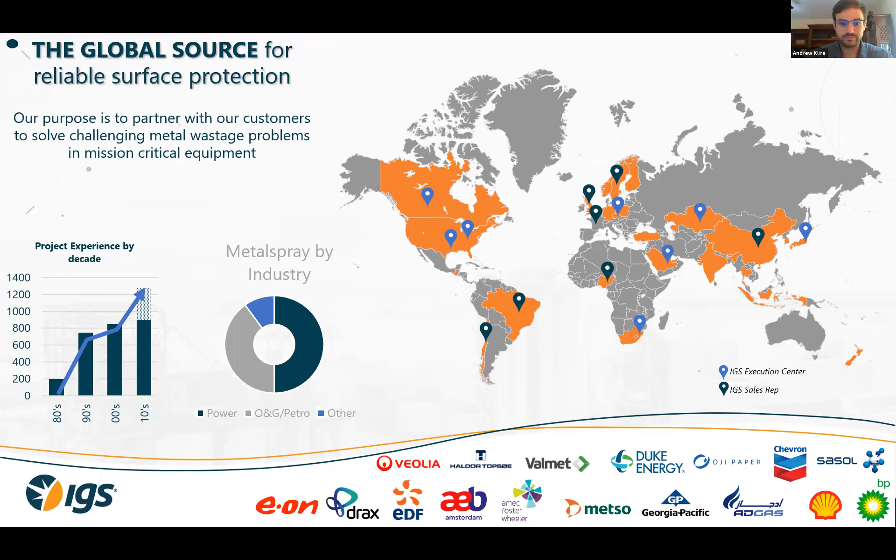We like to kick off all of our presentations with a safety moment. Obviously we're a field service entity, so field safety is very important for everybody. I had an interesting experience over the weekend - nothing bad happened, but it caused me to turn around and go, man, that was a little dumb.

I was out on the Chesapeake Bay, and we were going back to a marina by boat, and we had an option to either go back to the marina, about a 15-minute ride, or go back to the dock, which was an hour ride the other direction. The rest of the group went to the marina, and I let everyone know at the marina that I was going back to the dock, but I didn't tell anybody that was back at the dock that I was going back to the dock.

And realizing I was leaving right around dusk, part of it was a night ride, and on the bay, if something happened and you drifted out, didn't have cell service, no one was really expecting me. So it caused me to take a step back and think, one, how dumb that was, but also how that relates to travel - most of us travel for work. Make sure people know where you're supposed to be. If you get stranded out there with no cell service and an hour's walk in either direction, that can make for a really bad time if someone's not aware.

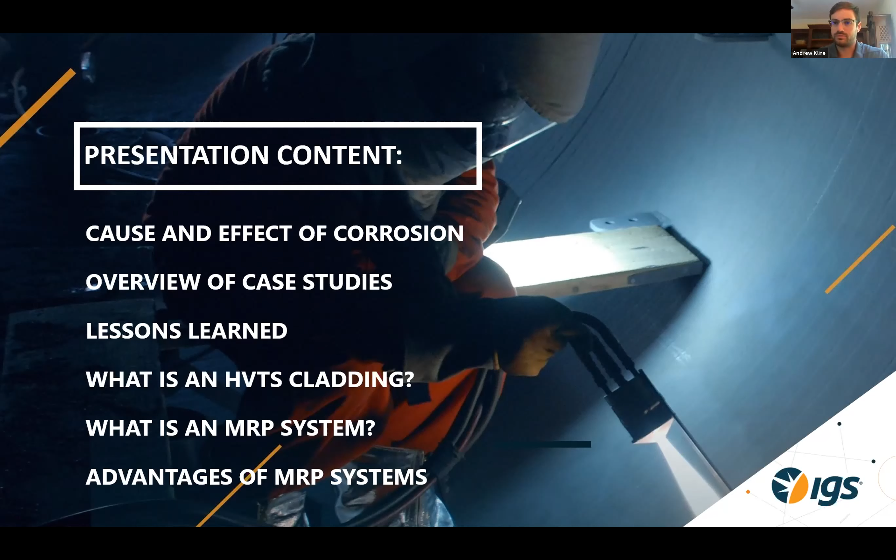So today, jumping into the meat of the presentation, doing a broad overview of what causes the corrosion, why we're seeing more corrosion in recent years, and an overview of a case study from about 10 years ago that's been in service the full time. Then lessons learned from some other situations and how we were able to make improvements on the already reliable technologies. And then what is it, how's it work, how's it relate to the changes we've made, and lastly, what are the advantages of the changes made to the technology in the SDA applications?

So we all know the basics on dry scrubbers - they're designed to be dry, not supposed to have any aqueous solution hitting the wall, any moisture, anything like that. So most of the OEMs made them out of carbon steel because it's cheaper and it should work. But as we all know, this day and age, we have cycled loading, low loading conditions, economic reserves, different injections for different reasons, some emissions control, some efficiencies. All of these things can change the chemistries and the environment in the SDA, and that can lead to a lot of these corrosion issues.

What we've seen is there's some units that always had corrosion issues that were well known and documented, and they knew they had to deal with them. But on the flip side, we've seen more and more units that have been periodically checking to make sure they have wall thickness and aren't experiencing loss, and then all of a sudden, this last check, they had a dramatic loss in wall thickness. I think that's really in part to the cycled and low loading conditions - it allows us to get closer to the acid dew point temperatures, and also different flow parameters allow flows not to be uniform. Wetting can occur in one area, overspray might be happening because of the flow discrepancies and things like that.

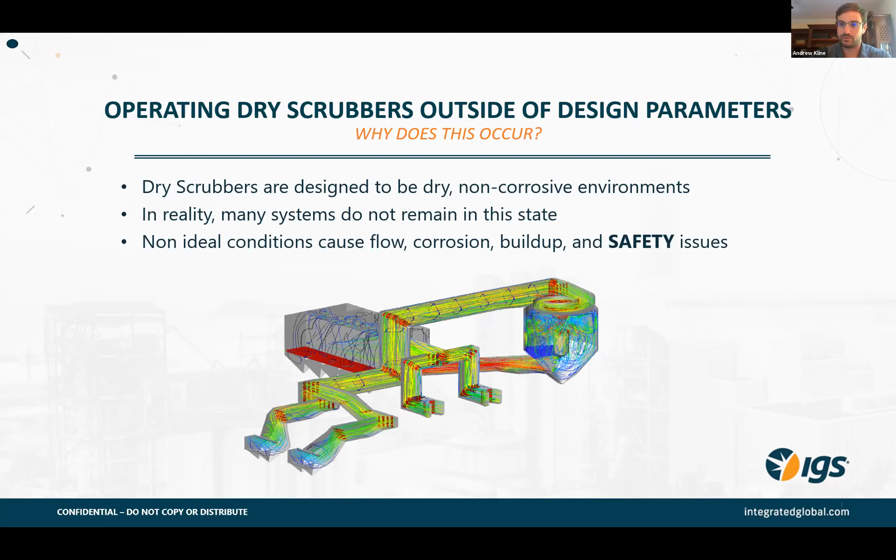And what does that cause? We've all heard the stories of some catastrophic failures and collapses. Huge safety concern. Luckily, no one was hurt when the one pictured here happened, but as you can see, significant downtime, significant cost to repair, and just an all-around preventable situation.

But also on the lesser end, just wall leakage. When you start to get pinholes and larger holes in the wall, you have air-in leakage, which can cause a host of issues for the mixing of gases, efficiencies, and pressure drops through the system. But then also contamination out, which can be a safety issue, and then the cost associated with fixing all that.

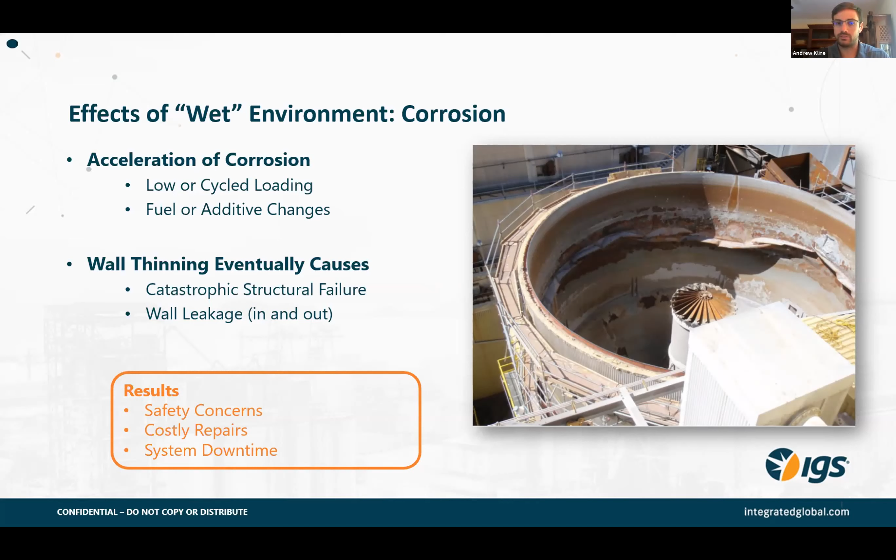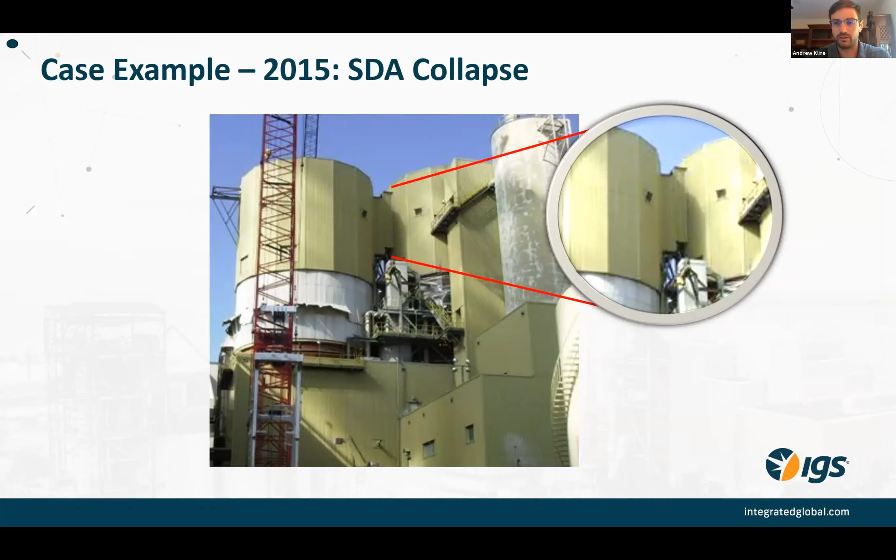Just another view of that collapse. You can see the penthouse here dropped about 8 feet. Luckily, no one was up there, and luckily it dropped straight down and what we call beer canned, where it just crushed. But if it would have gone sideways, you can see the control room is right there, and that could have been way worse than it was. So luckily it was not, but definitely an eye-opening experience for everybody.

So another situation where it was a similar corrosion issue in the spray affected zone of the Antelope Valley SDA units. They were experiencing wall thickness loss. They knew they were having failures, and they wanted to freeze the condition before it got worse. So they turned to IGS in 2011.

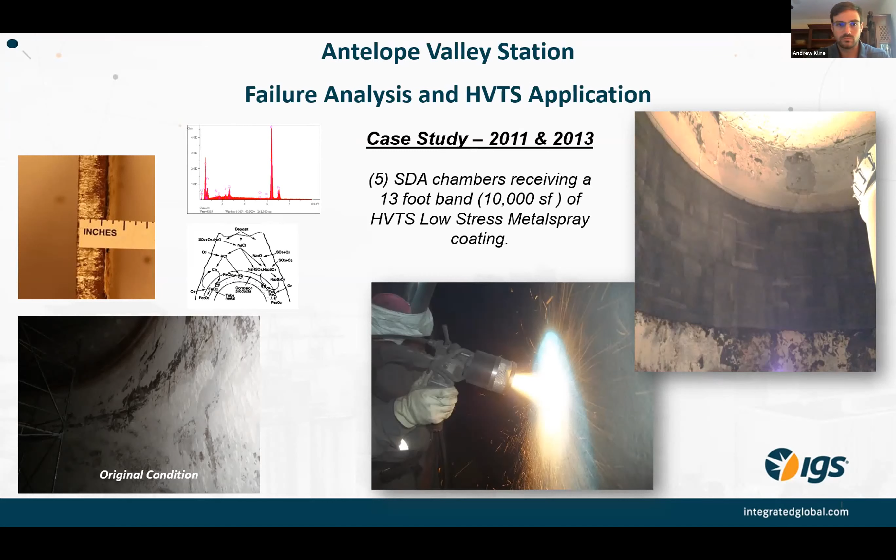Now, it was inspected in May 2014, a relatively short time after the installation. But when it was inspected and the slagging was removed from the wall, it was clear that there was no discoloration or anything to indicate corrosion. We were actually able at that time to use an Elcometer to do some spot checks of thickness, and there was no thickness loss off the nominal thickness.

Something important to note is that a corrosion application is much different than an erosion application in this sense: if something's going to fail, it's going to fail relatively quickly for the most part. There are some cases that can saturate materials over time and cause longer failures, but within the expected lifetime of the material, if you're going to have a failure, you're going to see it very soon. So that was a good indicator from the beginning.

Now we were able to get back in and inspect in October 2020. During that inspection, we only had access from the access door, so we weren't able to get up to the spray affected zone where the coating was. But in this photo, you can see that under the slag or ash accumulation, there is no discoloration in that spray affected zone, and you can see almost clearly the lines of the coating on the top and the bottom.

However, on the top and bottom around that zone where there is no coating, you can see the carbon steel has started to turn and is showing signs of corrosion. We talked to the plant and said, make sure to pay attention to those areas, because this is what we've told everybody: once you've coated 90% of your problem, typically your spray affected zone or the crease in the cone, people often just fix the problem and move on to the next thing. But 10 years later, you come back and you've fixed the bulk of the area, but that area above and below still needs attention, because if you neglect that, over time you'll have a failure in that region.

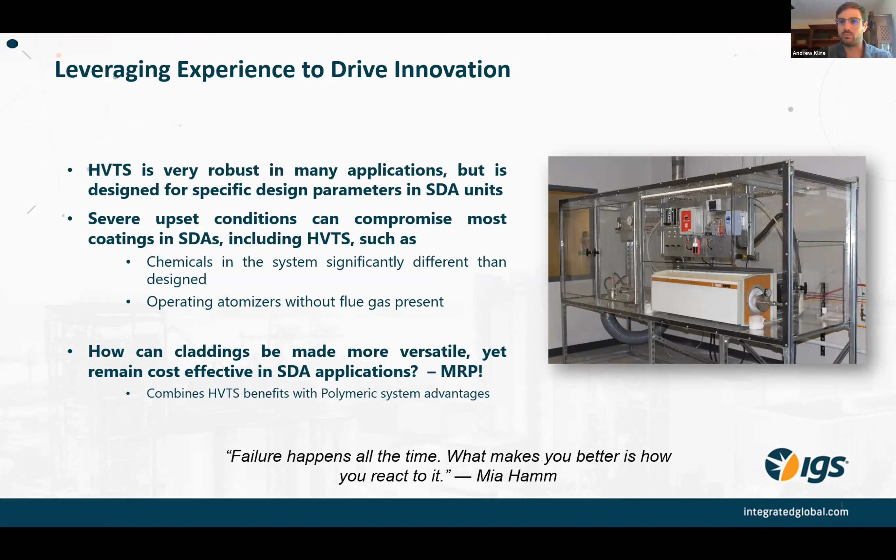Hey everyone, thank you, Andrew. So I'm just going to start off with a quick overview of thermal spray. It's the first ingredient or building block to our MRP, so understanding of that is necessary.

Thermal spray is really the process where molten particles are propelled by some carrier gas to a substrate to form some sort of protective lining. It's also known as metal spray, and can also be seen as an alloy upgrade. If you wish your equipment was made out of a Hastelloy or stainless steel or titanium, that's actually possible to do with thermal spray.

It's grouped into electrical heat sources and chemical heat sources, and then you've got various technologies under each of those groups. The picture on the bottom left shows the process where you've got spray material going into the spray gun, either in powder form or wire form. You've got some form of energy, whether it's electricity or combustion, and then you've got the particulates being projected onto the substrate.

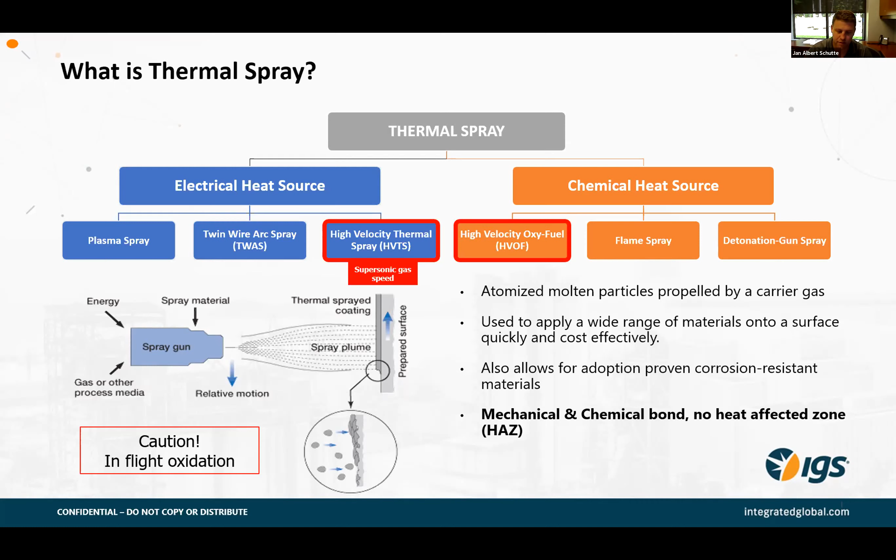This just shows the thermal spray process that IGS typically does.

Thermal spray, our company started in the paper and pulp industry probably 30 years ago, maybe even slightly more than that. Since then, a lot of time has been spent developing both the materials and the processes, up to a point where thermal spray is now recognized as a solution for most industries, most big names, and most major oil and gas conglomerates, such as Chevron and Exxon. So it's really a well-recognized, well-proven solution with various case studies out there.

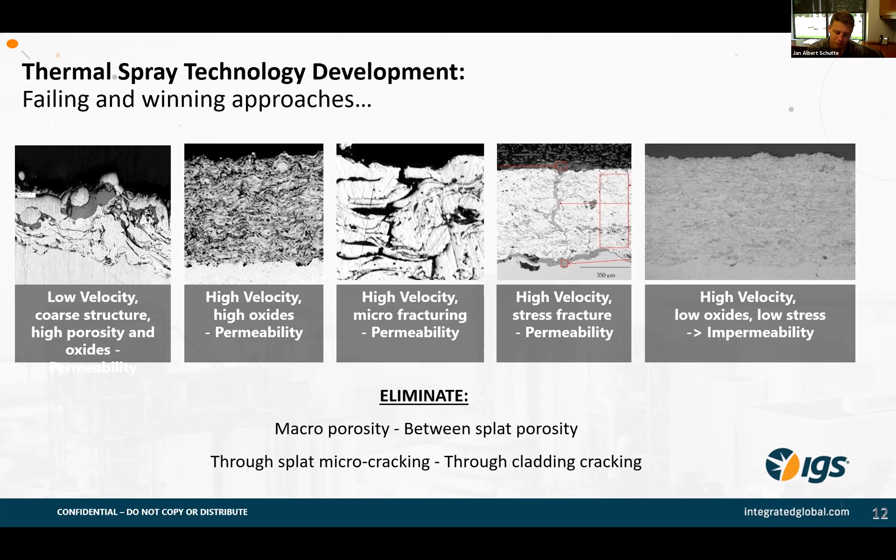To achieve this, there are really proven precautions out there to take when selecting material or equipment to apply thermal spray to achieve these results. So that's a quick overview of thermal spray.

So what is MRP? MRP is fundamentally a metallic system coupled with a top coat. This means it really gives you the ability to broaden your protection range. It's also not that sensitive to mechanical damage, so that's a big deal when you've got scaffolding going in and out of equipment. If you whack metal spray with a piece of scaffolding, it's still going to be fine.

Since it's a metallic system, the metallurgy can be selected very specifically for the process environment. The metallic layer can also be optimized to give you the best protection, but also optimized to give you economic and cost-effective protection. So when this metallic layer is combined or coupled with a polymeric top coat, you really get a protective layer that's highly resistant to chemical attack, mechanical damage, or even thermal mismatch.

Furthermore, the system, because it's metallic based, is not sensitive to all those environmental controls necessary for typical organic applications. There's a picture at the bottom here that shows the light gray as your substrate, which, for instance, would be carbon steel. Then you've got a blast profile, which really facilitates very strong adhesion for the HVTS cladding. The cladding itself creates a metallic layer for the non-metallic polymer.

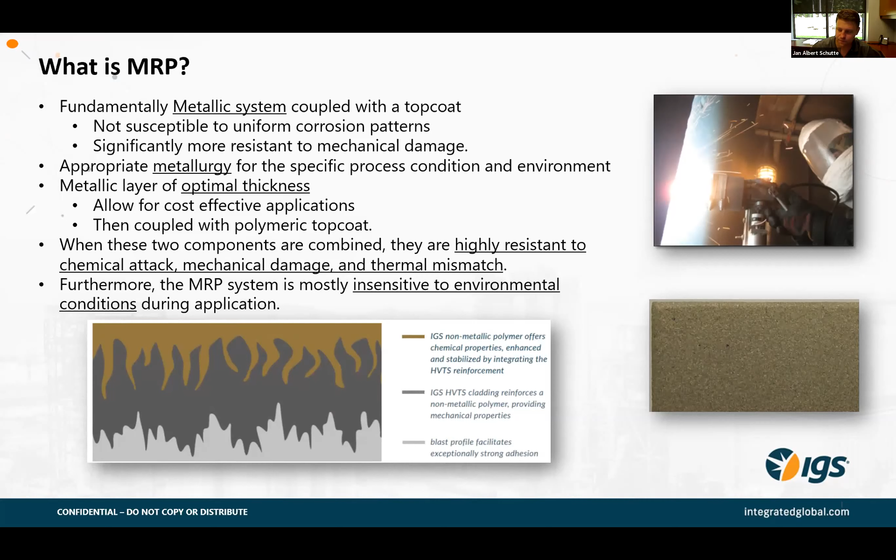So MRP is designed to be effective against all these wastage mechanisms in the pictures: pitting corrosion, acid attack, dew point corrosion, erosion, and also fouling.

So it reduces the critical path time. It's practically no curing. Once the metal spray has been applied and the top coat has been applied, then within 12 hours of application, you have the equipment back.

So it gives you some resistance to steam out and also mechanical damage, as mentioned before. If there is a spot that's been compromised or damaged, it's repairable, so no need to strip everything. You can repair just that spot.

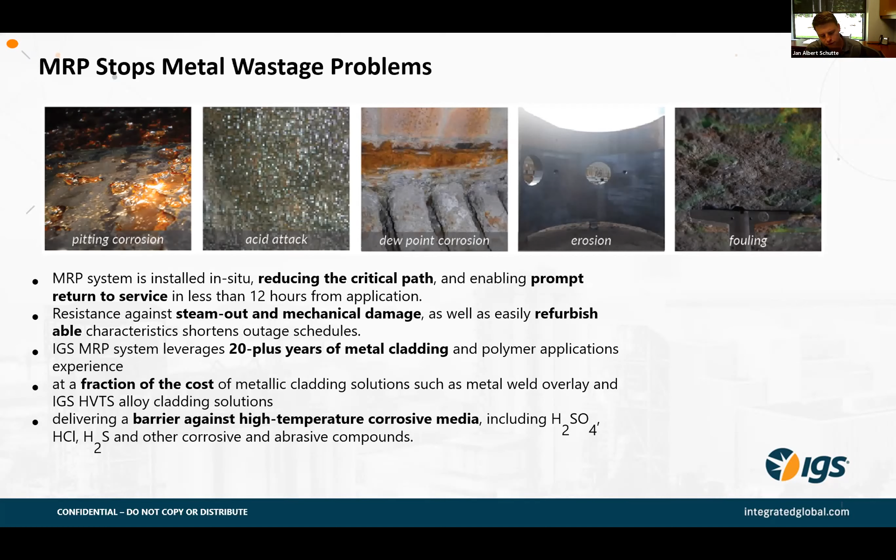And then the ultimate goal here is to skip shutdown cycles. So it is considered a long-term solution, not a temporary solution, and it provides you that protection at a fraction of the cost.

So looking at the last slide, Jan. Yeah, we have a question. We have a question that just came in for you: can you discuss what types of QC measurements are used to be sure the HVTS and MRP have been applied properly? Yeah, that question comes with great timing.

That's about the slide I'm talking about now. Good question. So the installation process, step one is blasting. We're looking for a white metal finish, and we typically use garnet to achieve that finish.

One thing to watch out for is to assess your surface once the blasting is done, in terms of pitting or sharp edges. If any of these exist, they need to be taken care of - sharp edges need to be removed or pitting needs to be opened before HVTS gets applied.

So that's the first step: blasting to a white metal finish. And then after blasting is followed by a QC function to make sure there are no holidays in the blasting and the white metal finish is achieved.

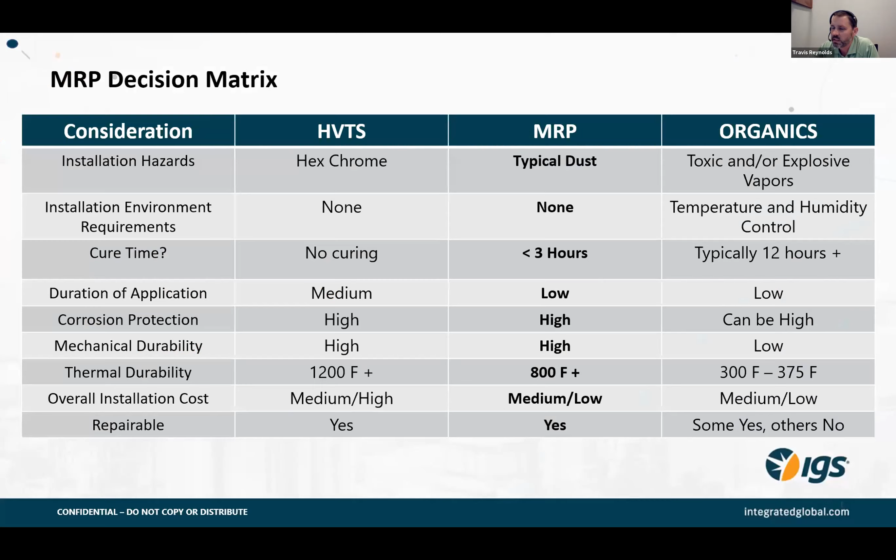Early on, one of the earlier slides you showed the top line, bottom line, and the range of where the spray cloud was going to hit the wall. Is your recommendation that that's the main area that's treated, just where your expected spray cloud impingement is? Or are some customers looking at going beyond that for safety, doing the whole sidewall, what's your experience there? Sure, that's a great question.

So obviously it's a function of cost, and if we are looking to get the maximum bang for the buck, they've been looking at just the spray affected zone. One of the nice things is, though, because corrosion can happen outside of it, especially if you have excessive buildup, a lot of times that cone section, acid dew point on the cone, if you're getting colder areas down there, it condenses, so you get moisture there. It's really a case-by-case basis. Once you've seen, okay, where are my problems, you can optimize. But some customers do opt for complete protection, and once again it's a function of cost. The nice thing is with the MRP, it brings the cost point down. So maybe where the HVTS, because of the cost, I only have enough in my budget to do the spray affected zone, which is 80% of my problem, now I can actually look at the protection of the full vessel. So case by case, there's customers that have done both, but obviously to be on the safer side of a more robust solution would be doing the full vessel.

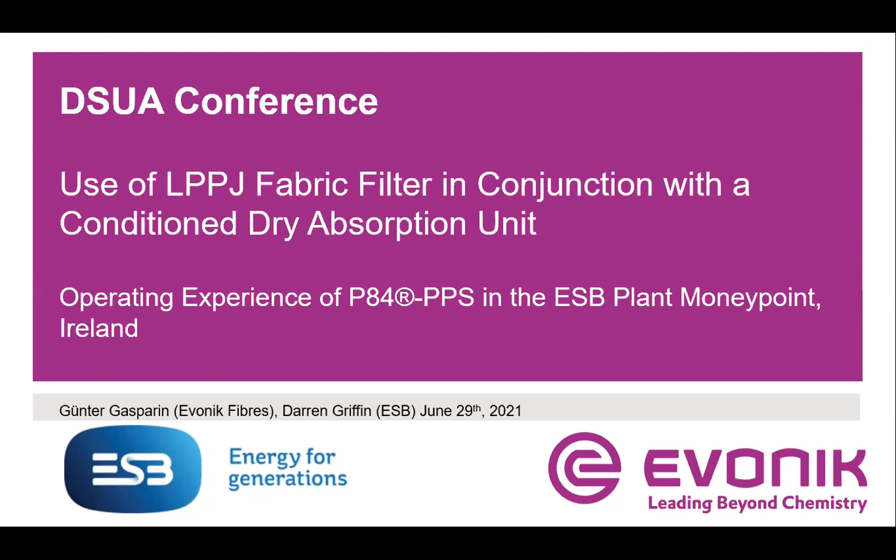So, hopefully this works. Yes, now things are moving. My presentation today should focus on the role of the fabric filter within these dry sorption systems, as well as conditioned dry sorption systems, because these apparatus are sometimes quite underestimated.

Before we get into details of today's presentation, I would like to introduce this little bit strange constellation between an end customer and a fiber producer first, by introducing both companies right now.

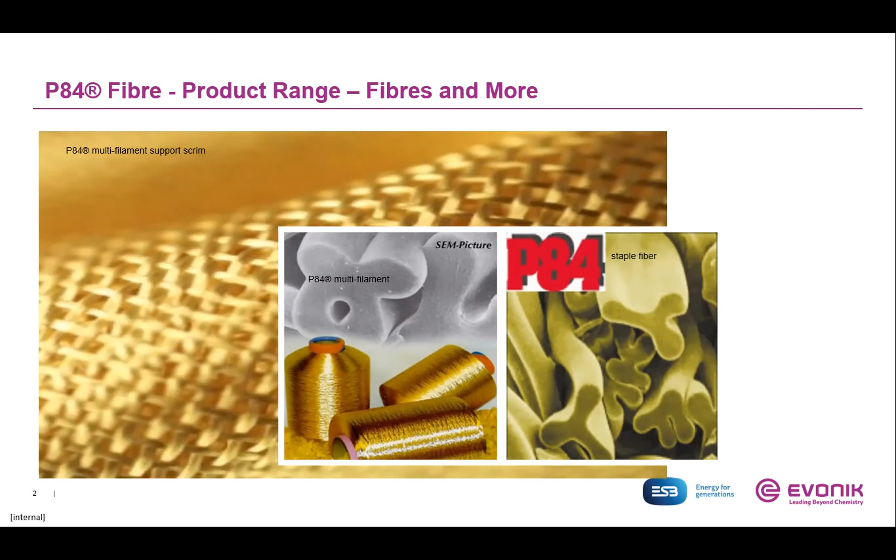Evonik Fibers is a fiber producer located in Austria, and we are producing polyimide products. Among these polyimide products is a high temperature fiber which has the brand name P84. This has been used for industrial applications for a very long time, and it was born something like 30 years ago. In 2014, we celebrated our 30th year of history, and there is one major application for the fiber, and this is definitely industrial filtration.

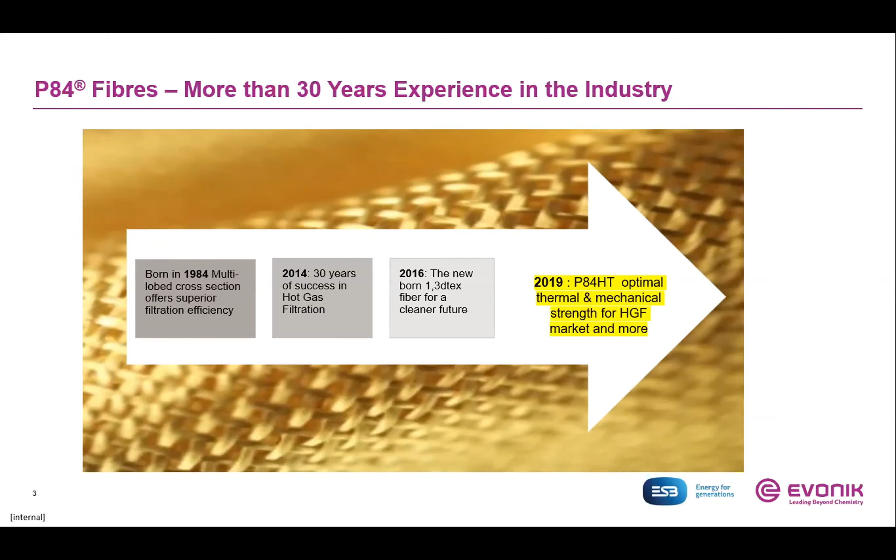Things and demands have changed in recent years, and we've been introducing more and more grades into this industry. In 2016, for example, just to give you some spotlights, we announced the introduction of a 1.3 fine fiber, which is suitable to deal with even lower emissions. In 2019, we launched another product, the P84HT fiber, which has a little bit different chemistry than the standard P84 fiber, and is even capable of dealing with applications showing a higher operating temperature than the standard one.

Our partner, and I have the honor to take over this part of the presentation as well, is the Electricity Supply Board, ESB. The company produces electric energy in Ireland, with headquarters in Dublin. They have an installed thermal capacity of 3.8 gigawatts, mainly in Ireland but also internationally in the UK.

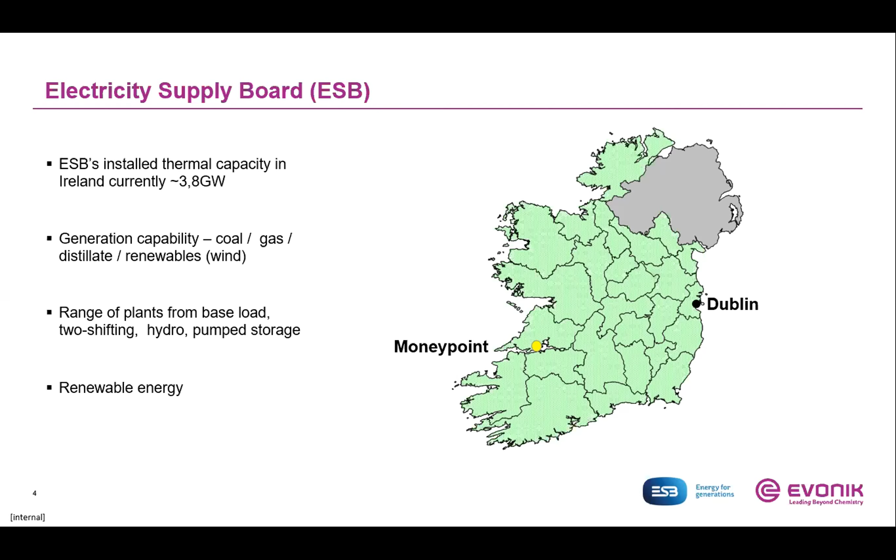They have multiple units running on coal, gas, distillate, and also, more and more, renewables. So the range of plants is well shifted: some baseload plants, and the plant we're talking about today is a baseload plant, and two shifting hydro and pump storage. It's worth mentioning that the pressure on the whole energy sector is increasing steadily, so renewable energy is gaining more and more strength, and ESB is investing heavily in this, especially offshore wind plants.

So now let's come to the application and plant we would like to discuss today, with regards to its history and performance. Moneypoint is a coal-fired boiler plant located on the western shores of Ireland, alongside the river Shannon, close to the city of Kilrush. I hope I pronounced that correctly - please, all Irish people, forgive me if I didn't. There are 3 units, each with a load of 305 megawatts electric, pulverized coal-fired boilers, and by coincidence they were also built in the mid-80s, like the history of our P84 fiber began.

The coal that these units are burning is imported. In the past, the plant has used South African, Colombian, US, Indonesian, and Australian coal. The current supply is Russian coal only. This is the status quo over the last few years.

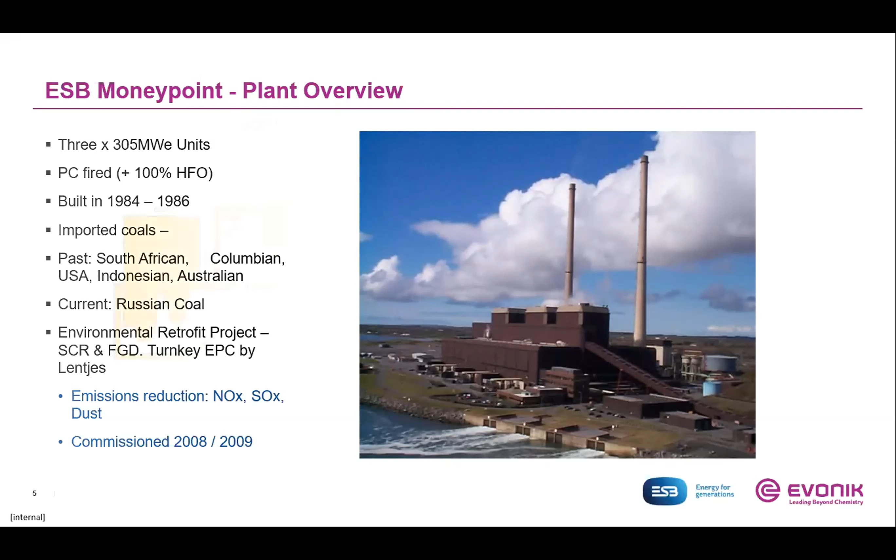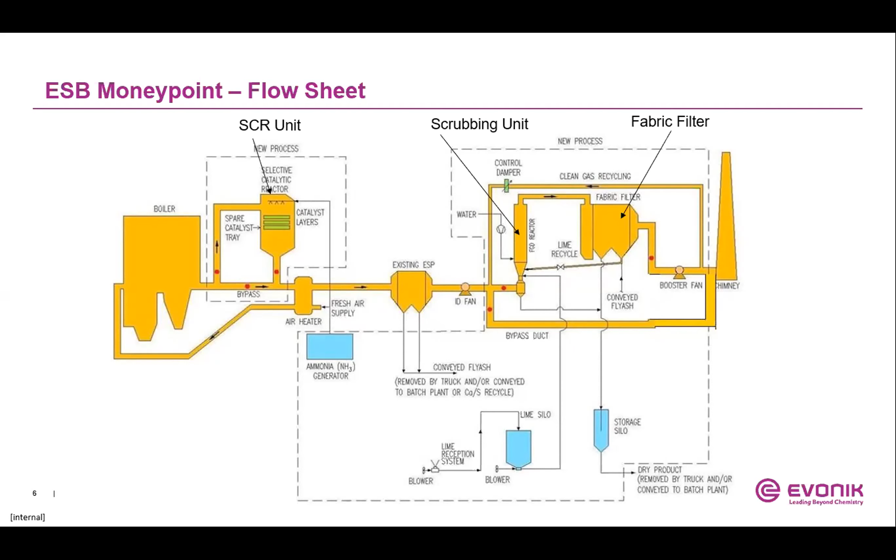A little bit more in detail, the FGD system. We have what is called a conditioned dry sorption system. That means you're not just adding the absorbent from a silo, which in this case is hydrated lime, but you're also adding water. And this is a vertical tower.

At the bottom end of this tower, the flue gas and the hydrated lime recirculate, come together, and are mixed in a very highly turbulent zone. Then there is a certain residence time in this apparatus, and after that, the clean flue gas as well as the dust enter the fabric filter. The fabric filter needs to eliminate all dust components, letting the gas pass through the filter elements.

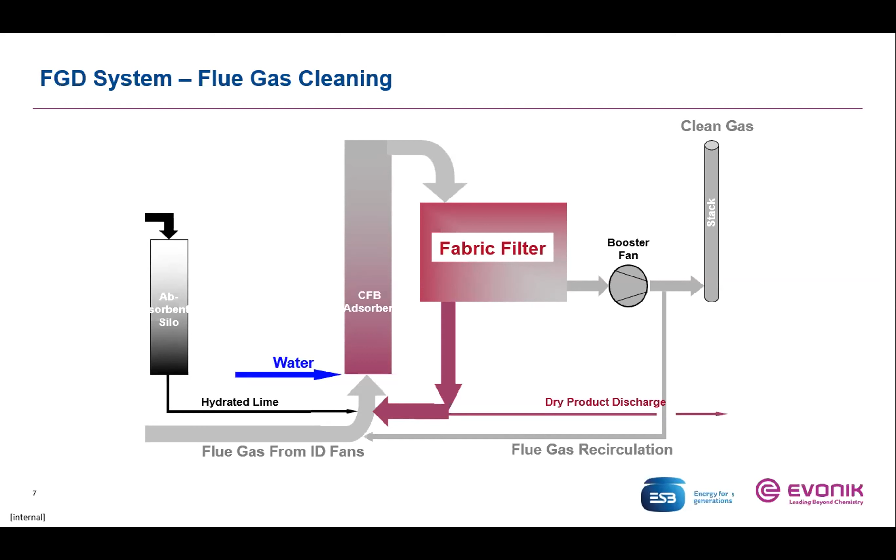But it is important to mention that this system is a recirculation system. That means only part of the product is discharged, the main part is recirculated. This is also for economic reasons. And there is a further recirculation of the flue gas, so in order to keep certain flow conditions in this FGD system, the flue gas can also be recycled to a certain degree.

A little bit more on the fabric filter house. This is what the industry knows as the Lurgi design. You have several bundles of oval-shaped filter bags, collected in several chambers, with 2 bundles in one chamber. In total, the installed number of bags is...

11,760 bags with a length of 8 meters. So the total filter fabric installed has an area of 37,630 square meters. The material used is partly P84 material, with the main portion being polyphenylene sulfide, shortcut PPS. Fabric weights are also typical for industrial filter units.

What is important is that this is a low pressure cleaning system. That means the cleaning is not just done by a very harsh pulse jet entering each individual filter bag, but it is really rather evenly distributed, more like a flushing.

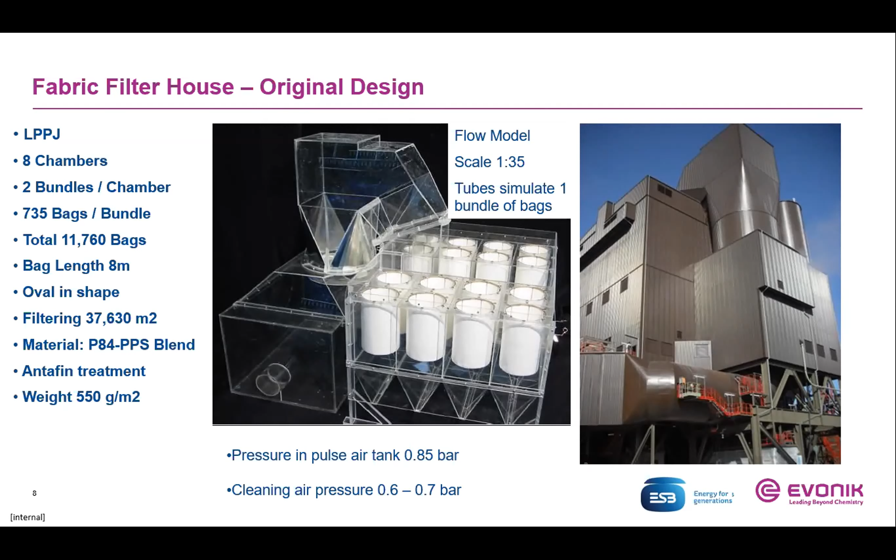So also here we have again some pictures of the overall plant, and a few figures of the operating time and operating conditions. The filter bags currently in use have seen a significant workload so far. Unit 1 and unit 3 are close, with unit 1 even close to 40,000 hours, and unit 3 close to 38,000 hours.

Unit 2 has not seen that many operating hours, but I was informed that both units 1 and 3 are used to provide the base load, and unit 2 is running not that frequently. This is one reason why the operating time of unit 2 is not the same as unit 1 and 3. The operating conditions are pretty much in the range typical for such coal-fired boiler units.

So we are talking about flue gas temperatures in this scrubbing filter unit of 70 to 72 degrees C, which is transferred into imperial units around 160 Fahrenheit.

So SO2, NOx, and dust are well in alignment with the emission regulations of the European Union. And for economical reasons, the plant is also running with a certain distance to these allowed emissions.

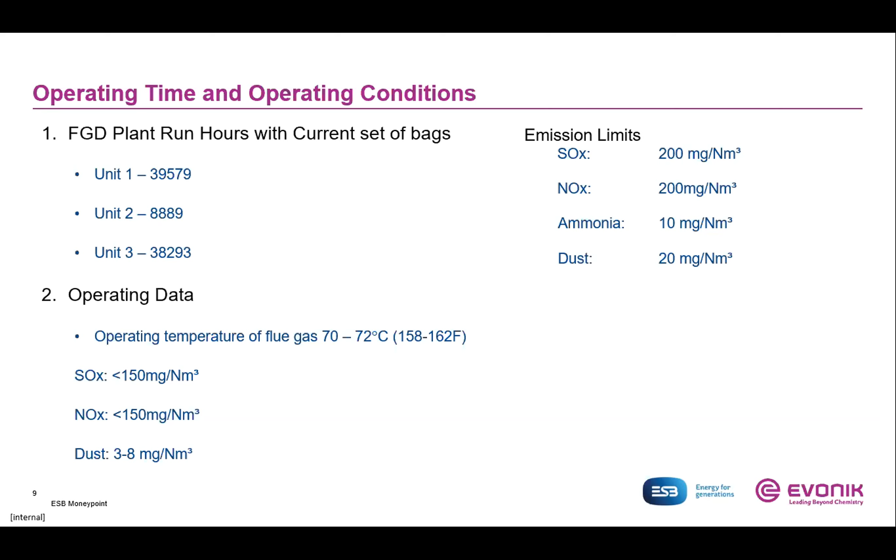The key parameter for successful operation, as confirmed by Darren, is to watch all the parameters that are ongoing. This is also the main topic of our today's presentation. So you have to take care of all parameters coming from the plant.

Normally people tend to check two things when talking about the fabric filter: the delta P across the fabric filter, and the dust emission. This is the most important thing for authorities.

But if you really have good experience with your bag filter systems, it might also be worth looking deeper into this pulse cleaning system, because before even delta P increases due to blockage of the bags or other reasons, normally the cleaning frequency is increased.

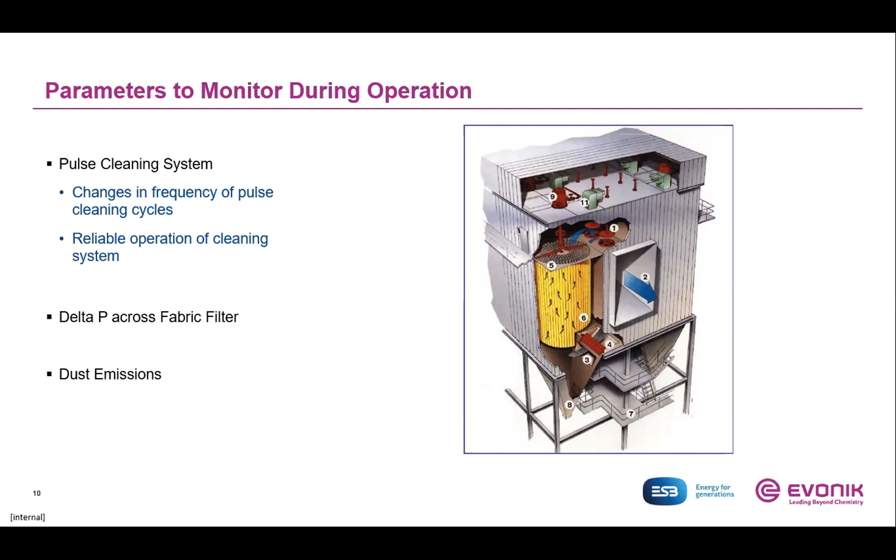And this is something Moneypoint is really taking care of. Of course, cleaning frequency can vary in a wide range - the more dust is coming in, the higher the cleaning frequency. So you need a certain experience in this regard, but nevertheless this is one important thing they are looking for.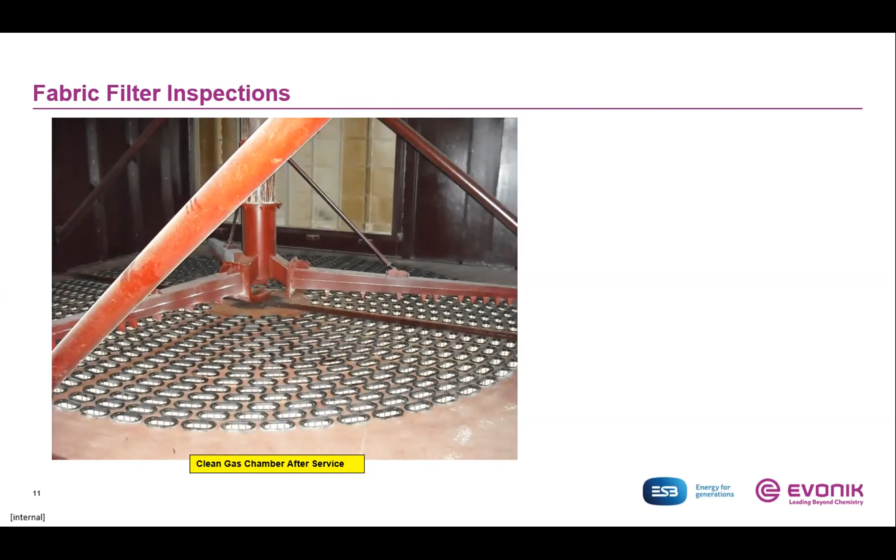And of course, filter bag inspections. Here you see this typical view on the cell plate of such a fabric filter with this Lurgi design, with this rotating manifold and the nozzles that are really flushing air through these many filter bags, circularly aligned and having an oval shape.

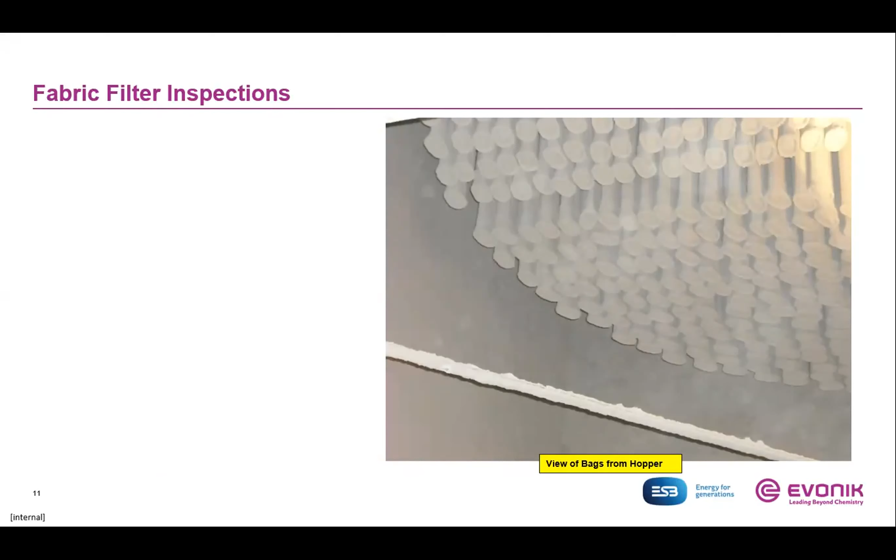This must also be done from the bottom in order to figure out if bags are touching each other, if the alignment is okay, and if there is any abrasion detected beforehand. So this is one part of it, and this can be done during outages or during operation.

But of course, one thing is also to extract the bags and test them by external companies. These are, well, in this case - Guenter?

Sorry, we had a question come in. The question was: the ESB operating temperatures are quite low and SOx levels are high. Can you advise what your corrosion experience is there?

So far, they didn't mention any - I didn't discuss this topic in detail with Mr. Darren Griffin, but I would like to hand over this question to him later on in order to figure out at the plant. This is something I'm not able to answer right now.

What measures are they taking, what precautions are they doing? I know that they, for example, pre-coat the filter bags. This is in order to prevent damage on the bag material itself. Of course, this pre-coating layer also coats the wall, but this is a temporary measure during shutdowns and startup procedures.

So this is a question that I would like to have handed over to the people from ESB Moneypoint.

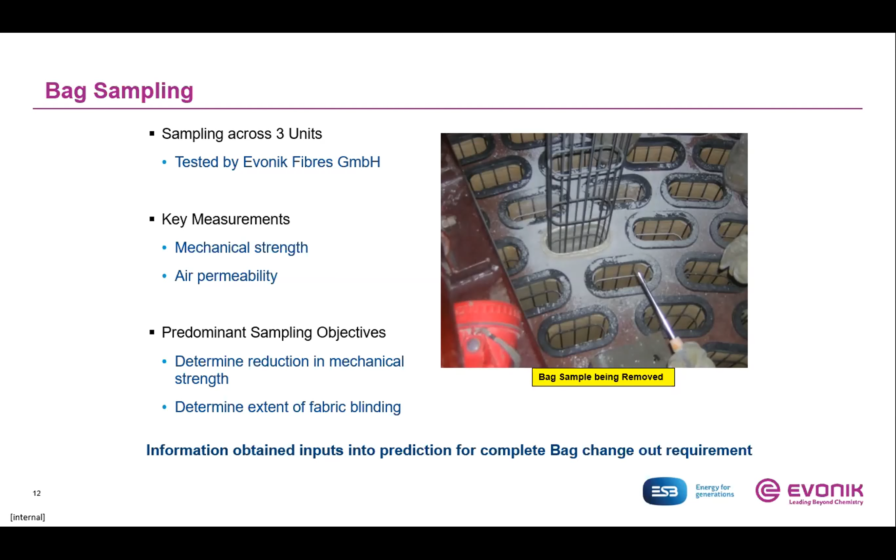Before we enter into this, I'd like to spend some more minutes on the specifics of fibers, especially the P84 fibers. The most crucial thing in filtration is that you need to provide a certain high specific surface area. This can be done in two ways: either you generate very fine fibers, or you have irregular shaped fibers. This is the unique thing about the P84 - it's the only truly multi-lobe shaped fiber available on the market, offering something like 60-70% more specific surface area compared to a standard round-shaped fiber of the same thickness.

If we go down even further this line, as I mentioned, the finer the fiber, the higher the surface is, we can end up at specific surface areas of almost 600 square meters per kilogram of fiber, which calculated back on the standard fabric weight of a bag is something like 300 square meters per square meter of filter bag provided just by the fibers. So this is the top end.

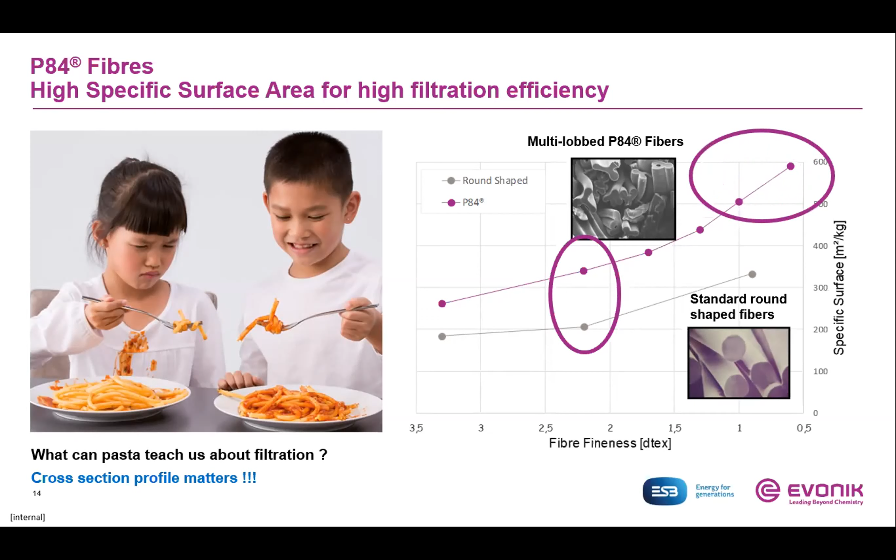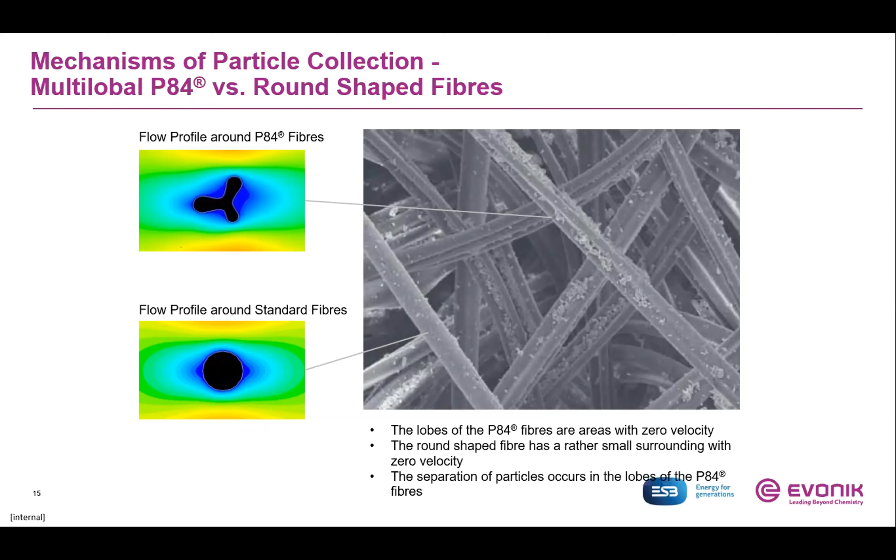So it is, as we call it, blended into this matrix. Then you have a woven construction in the center, related to providing mechanical strength, and also the clean gas side is manufactured from the base material, which is PPS, in order to provide mechanical strength as well as robustness.

So the story at Moneypoint is the following. The initial material was plain PPS. The P84 was used as an upgrade for the second set, and we are now approaching almost 40,000 hours of operating time.

The bags that we're extracting here are rather unspectacular, so we could not identify any mechanical damage, and we have investigated a serious number of bags of this installation. Some dust was brought in, but this was during installation maintenance, so we could not see any real damage, mechanical as well as abrasional damage from any flow pattern or misalignment of the flows.

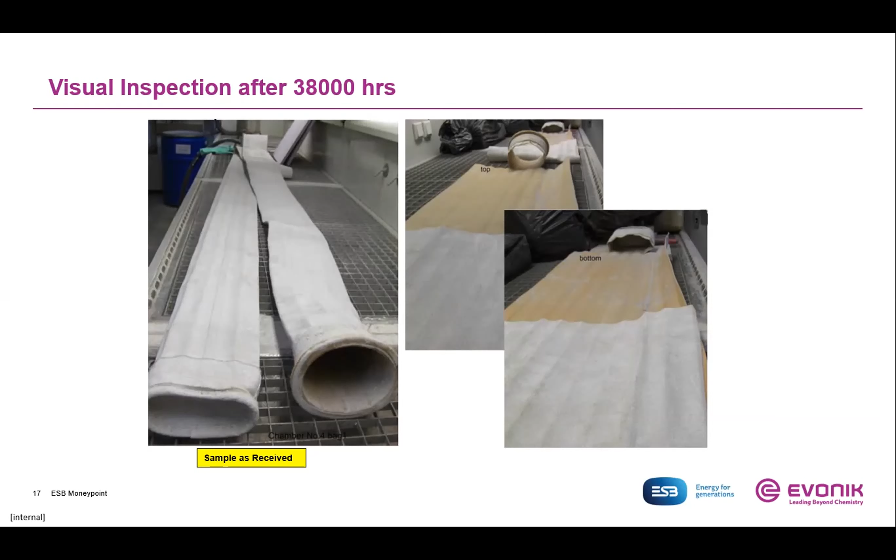And the most important thing is this one. We're talking about 38,000 hours, and still this filter cake is near the surface. The other particles that you see here are most likely accumulates that are transported into this cross section during the sample preparation. But you see here a very thin layer of dust, which is just accumulating near the surface of the fabric.

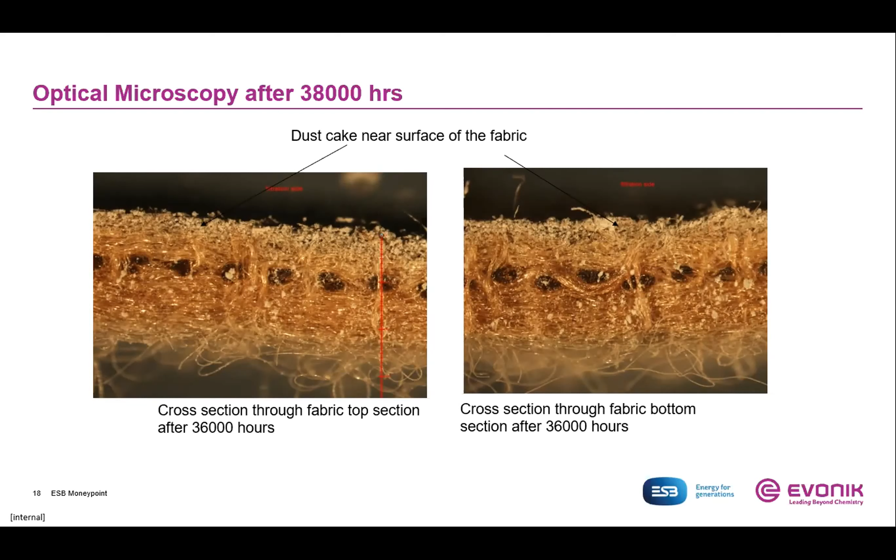This is a real good indication of a very stable filtration pattern, as well as reduced mechanical wear. Also the tenacity, which is one of the criteria to determine the lifetime of a filter material, is close to the levels of new filter bags.

This is due to two reasons mainly. First, as mentioned, the operating temperature is quite low, so the chemical aging of the material is not pronounced. Also, the acidic dew points are not a big topic, because then we would normally see some effect on the bags. The second topic is that the mechanical wear is almost minimized, and this is the main portion of this blended felt construction that does not allow dust to penetrate in, and then later on during pulsing, destroy the filter bags from inside out.

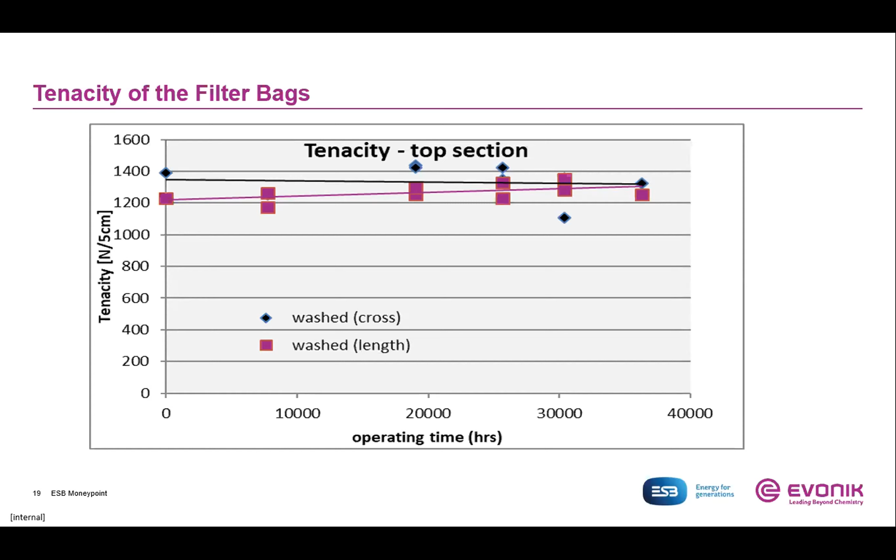Guenter, we have another question just came in. Can you advise what the filtration velocity was? It's in the range of 1 meter per minute, something like this. So, yeah, typical, not overstressing the whole thing. Not under. This is a typical range that people choose for, let's say, combined scrubbing systems with bag filters.

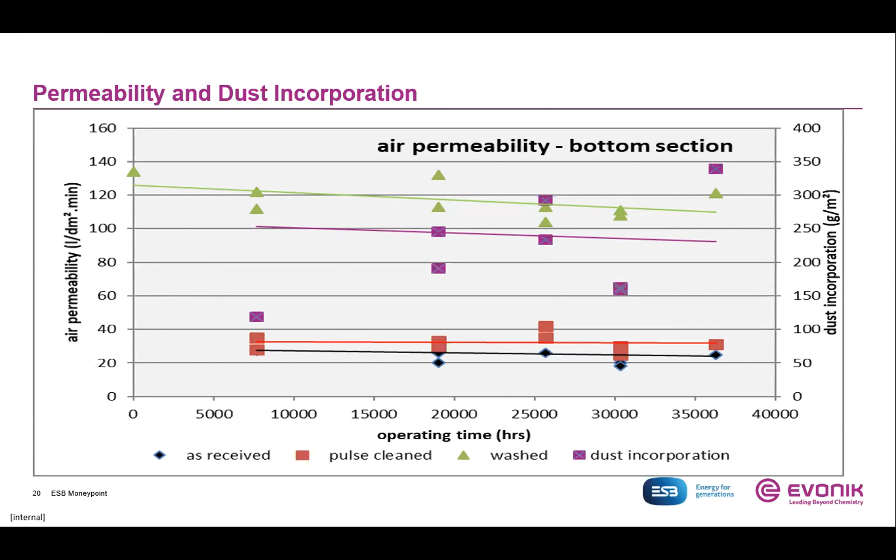As you have seen also in this regard, it's all about treating the whole system in the right way. So the filter bag material is just one part of the story, but it needs to also be maintained in a certain way. And this maintenance, of course, is something that starts from the installation of the bags with certain, let's say, good pre-coating.

It continues during the operation, that of course the desulfurization system is treated in the right way, so there is no big fluctuation in flows and also in dust loads. And of course, in a steady plant operation and also inspection, because one broken bag must not cost too much, but it can ruin a lot of other bags by the so-called cross-contamination, when dust is blown through this broken bag and into other bags.

So follow-up failure rate is something that can be prevented when you really talk about some preventive maintenance. And of course, if you do some external tests, because you cannot determine the condition of the filter bags by just watching the performance on the PLS systems, you can really have a good idea about the current status of the bags, and this will also help you a lot in your planning of further maintenance of bag exchange before even things happen.